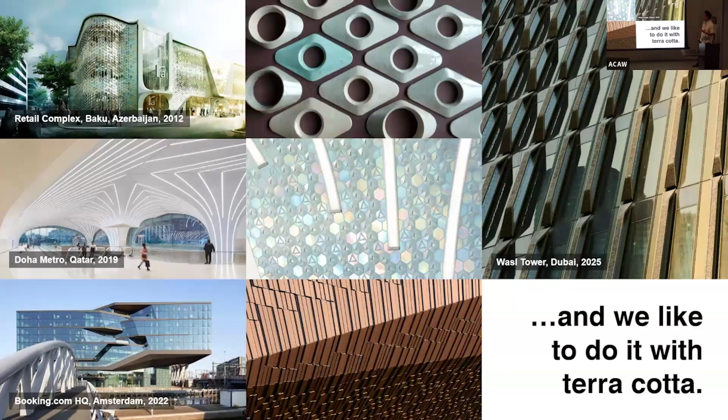At UNStudio, we always aim to create meaningful places, and that always depends on the context itself, because there's different scales we're looking at, whether they're bridges, towers, cities, or even products, to create a lasting impact. To do that, context is very important, and that context can depend, for example, on the level of a product. So for ACAW, we are pushing previous studies we've done, for example at the Wasl Tower with ceramics and terracotta, and other projects, to really test the limits and push the boundaries of what we can achieve through geometry, and also study the analysis to see what's possible and how it can affect the environment, and vice versa.

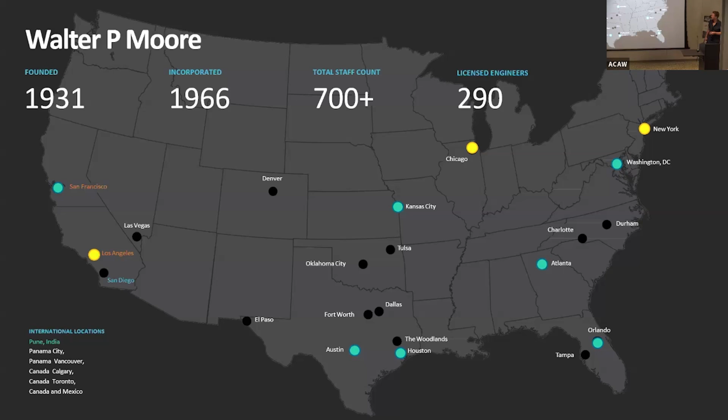This is our company, for those who are not familiar: we're a national and international firm of about 700 people, structural and facade, civil engineers, several other disciplines. We're coming out of the New York and LA offices, and we have a fairly large amount of offerings, which I won't really go into right now. We'll talk about that later if anyone's interested.

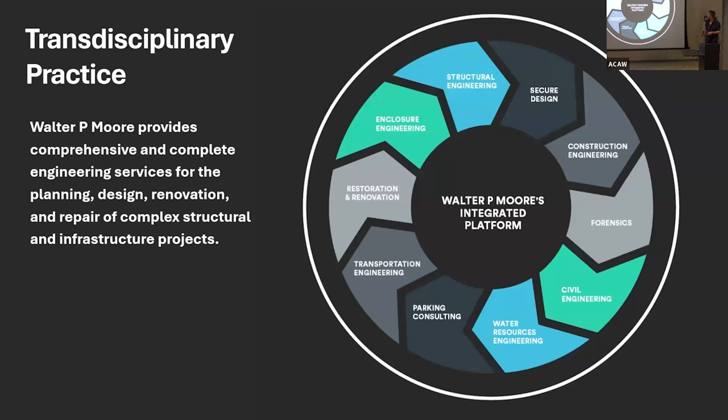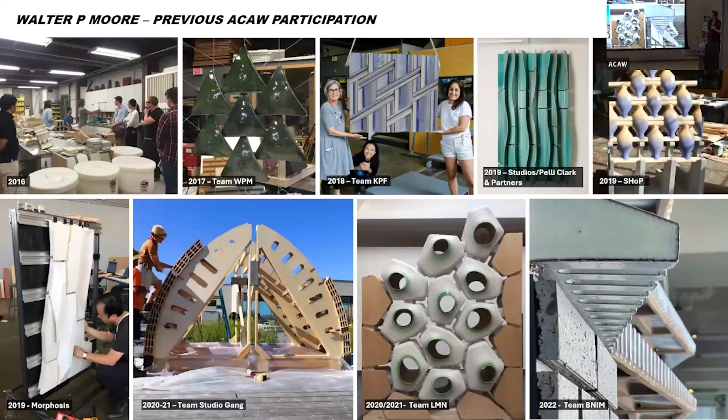We also do a large array of projects, just like UNStudio, trying to pay a lot of attention to placemaking, the human aspect of design and details. Even though a lot of the things we work on are very large, that doesn't mean that they need to be overwhelming, and sometimes we also do things in terracotta when we can, happily so. Here at ACAW, we've participated several times with many people that are here now and many people that have been here in previous years. We always enjoy doing whatever is thrown at us and sort of run with it.

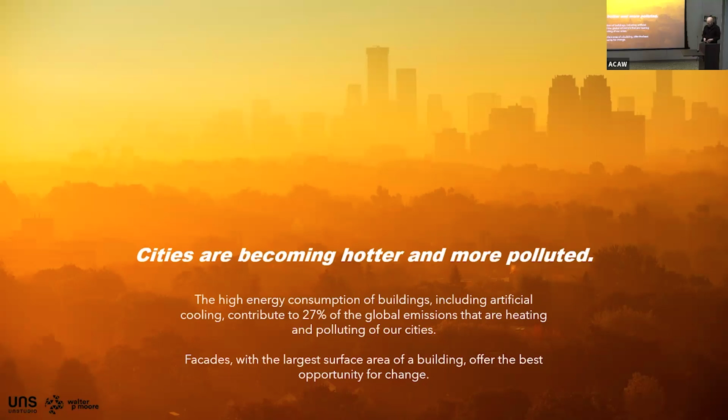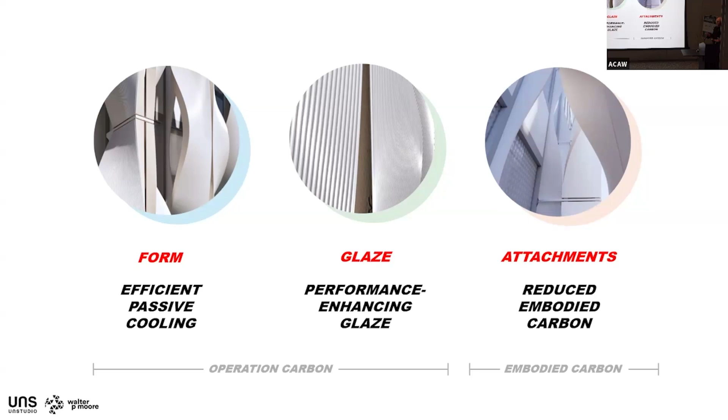So our proposal here comes with a threefold approach. First we're looking at the form of our terracotta facade system, how the form can be manipulated in such a way to maximize efficient passive cooling. We'll go into some of the inputs that drove the form that you see here. Then the glaze: terracotta is an inherently thermally performing material, as we know, but how can the glaze become part of that thermally performing possibility as well? Then the attachments, how can we design the system in a way that has a minimal attachment system to reduce the embodied carbon of the overall system? So we're dealing with operational carbon and embodied carbon in a combined way.

So first, looking at the form. The jumping off point for our project is the Wasl Tower, as briefly mentioned before. This is a project that we've designed, it's under construction now in Dubai. It is one of the tallest buildings that incorporates a terracotta facade.

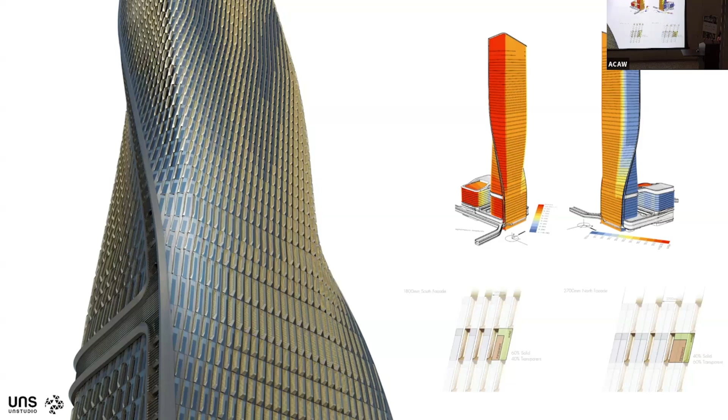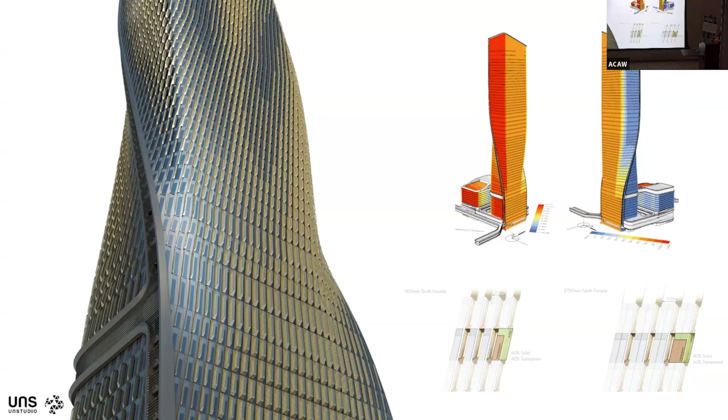Wasl Tower is designed to minimize or reduce the solar heat gain on the building, both in the overall form and in the arrangement of the fin system you see here on the left. As we designed, there have been all kinds of solar analyses done to show how we can arrange these terracotta fins to reduce that solar heat gain.

Here's a close-up of what that looks like on the left. You see the burnished terracotta glaze pattern and its attachment system. It really works like a kind of car grill. It takes on heat during the day, and by spacing it a bit separated from the building facade, it allows wind to move behind it to cool it off in the evenings as the sun is reduced.

There's a bunch of different factors we started to tease out from these studies: minimizing solar heat gain, minimizing the attachment system, maximizing visibility from inside of the building, optimizing daylight with the form, and a big component is how do you maximize the fabrication constraints of the terracotta.

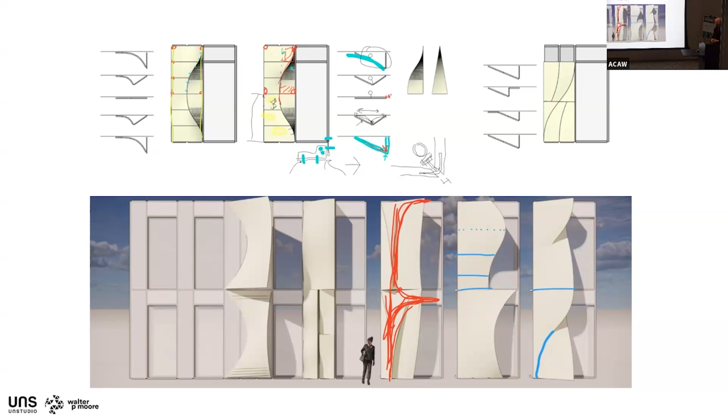In a typical curtain wall fully exposed to the sun, you have a lot of solar heat gain. Fin systems are successful in reducing some of that, but we wanted to take it further in our proposed system by manipulating the geometry to protect the building even more. We also have ideas about integrating ceramic frit to further reduce that.

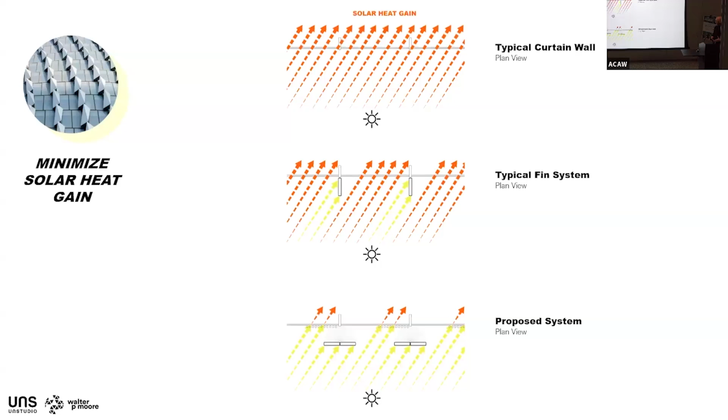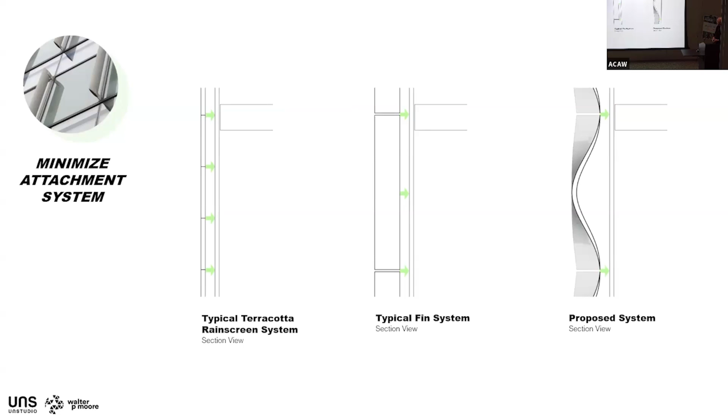Then minimizing the attachment system. Typical rain screens and fin systems might have multiple connections, but we wanted to maximize the fabrication constraints in this proposed system to minimize that attachment system. So in our system, it's really only connected top and bottom.

An important aspect is the visibility from inside of the building - how can the form be done in a way that allows for views through and behind the fin system as well?

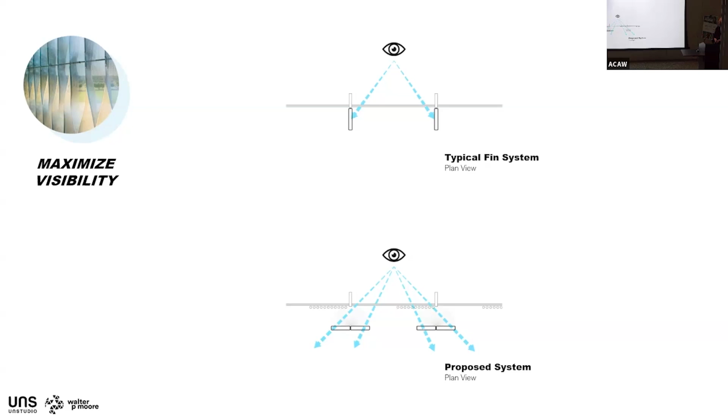And optimizing daylight - of course we want to allow light into the building, and how can the form be adjusted to maximize daylight deep inside the space of the building? That's part of the drivers of our form.

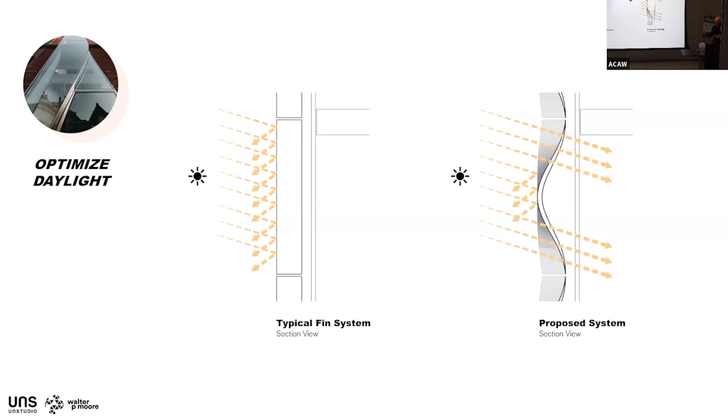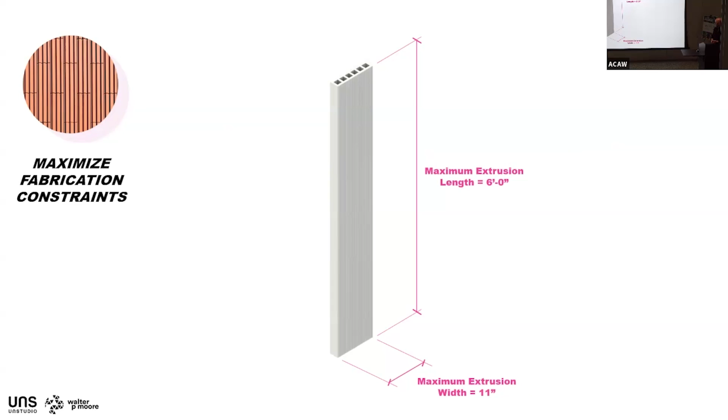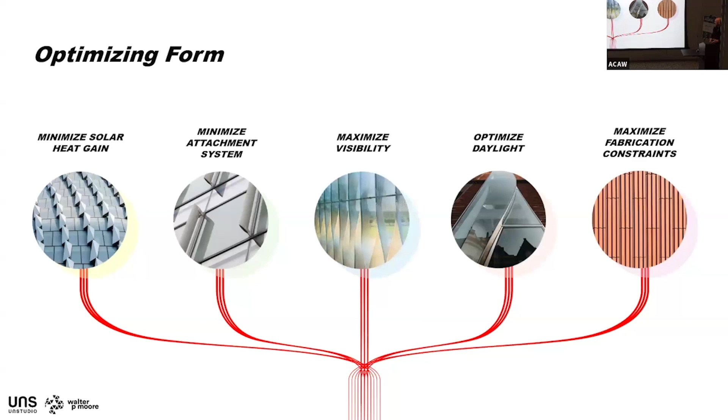And maximizing the fabrication constraints - this is what we've worked with Boston Valley on, trying to push the limits of. The maximum extrusion length we see on our mock-ups is 6 feet, trying to maximize the width as well. So taking all these different factors that are drivers of our form, putting them together...

And that's how we arrive at our forms - this kind of overlay of all those different inputs of the form. We're also seeing how we've done this in elevation and plan. This form was done by extruding to the maximum length.

We designed a form system that was then slumped onto - the form system is made out of terracotta as well, and the weight of the extrusion allows it to slump into the form to arrive at this twisted form you see here.

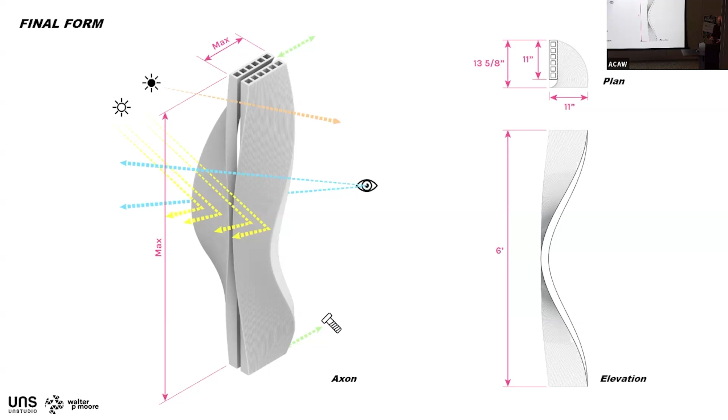And a big part of that, minimizing the attachment system, is how is this form stable and structural in a building application? So that's what Jake's going to tell us a bit about.

As Justin mentioned, part of the intent of this is to absolutely minimize as much metal on the project as possible. So in order to do that, we took it upon ourselves to try to optimize the amount of load that we are demanding the terracotta itself takes.

But because of the unique form of this, there's so much susceptibility to this system wanting to twist, rotate, and flex in somewhat unpredictable ways, because of how the fin curves and how it projects off the building, especially on a building like the Wasl Tower, where it goes quite high and twists around. We wanted to be as safe as possible, so the first thing we did was set a pretty low ceiling for what we wanted to allow the terracotta to take.

Using some of the data provided by Boston Valley, we tried to normalize this to take into account as much of the variation in the testing as possible, to minimize any of those potential variations from causing a problem on the project. Then separately, we applied a very high and rigid safety factor to the allowable stresses we were going to see, to make sure this is as safe as possible.

I think in the future we could probably refine this and reduce that, but for the purposes of this, we wanted the proof of concept.

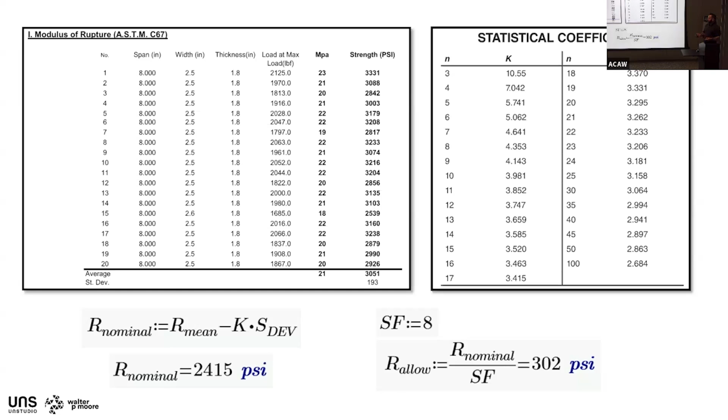Even with what we wound up finding, we set up a pretty detailed finite element analysis of this, and we ran it with wind hitting these systems at multiple angles and directions, trying to twist, pull, and flex this in as many ways as possible.

Ultimately, thanks to the strength of the terracotta itself, and also the internal structure of the webbing, the system performs very well and keeps those tensile stresses that want to break the material well below the limits we established for ourselves. I think in the future we could refine further, but for where we are now, at least as we're starting on this, the system has a lot of capacity and flexibility to take various loads.

We also investigated localizations of stress at the connection points to make certain that as this wants to twist, rotate, and break, it's not going to have a localized breakout at the ends of the system. As you can see, we use a threaded or sleeved anchor into the internal parts of the terracotta to help distribute that stress more.

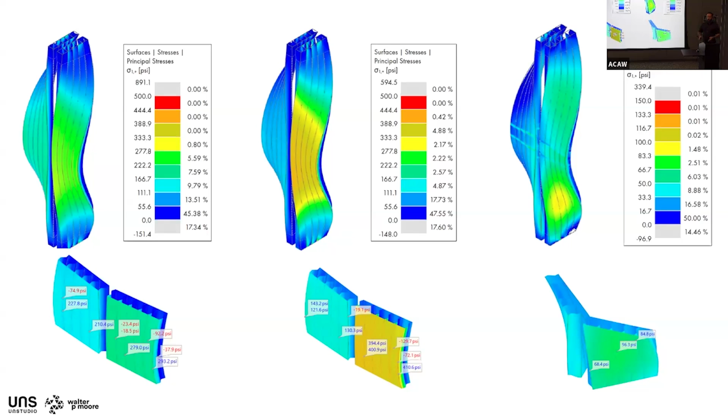We'll talk more about the attachment systems a little bit later in the presentation.

So, the next component of the system is the glaze, and Kevin's going to walk us through it. Kevin Canoply, UNStudio — thanks, Justin.

Justin and Jake just went through the first pillar of the presentation, which is how the form affects the carbon footprint of the building through things such as passive cooling, etc. The second pillar of the presentation will be about the glaze, and how the glaze actually contributes to the performance of the building, specifically by reducing operational carbon.

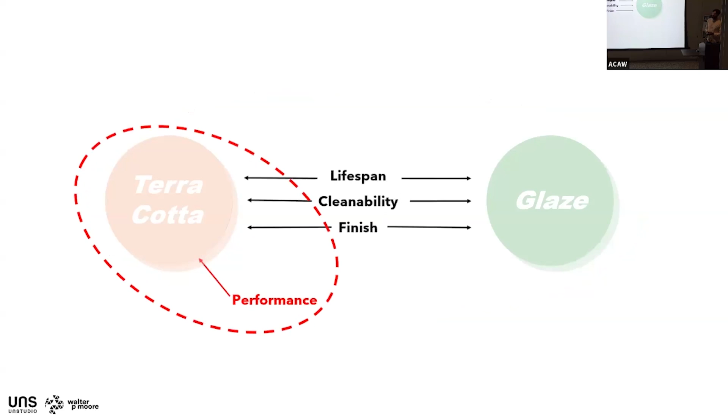When we look at a typical terracotta system, or what we'd been introduced to up to the moment of the workshop, the glaze already contributes, especially to the lifespan, the ability to clean the facade system, and being able to act as an integrated finish. What we weren't seeing was how the extra steps of needing to add glaze to the system, the efforts and the materials, that need to go into that.

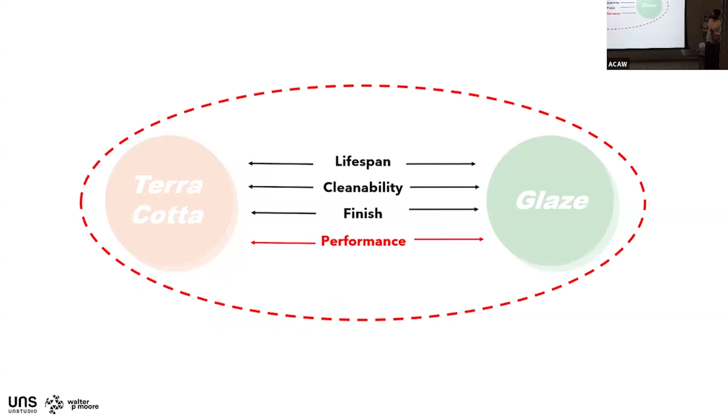We want to ask the question of how can we leverage that to also improve the performance of the system. As we mentioned before, it's an integrated system, and it should be leveraged in this sort of manner.

Similar to the first pillar, where we took inspiration from Wasl Tower, we also took inspiration from a previous UNStudio project for developing the glaze. The Coolest White was developed in 2019, an industry collaboration with Monopol Colors in Europe. Essentially, it is a high solar reflectance paint meant for metal substrates.

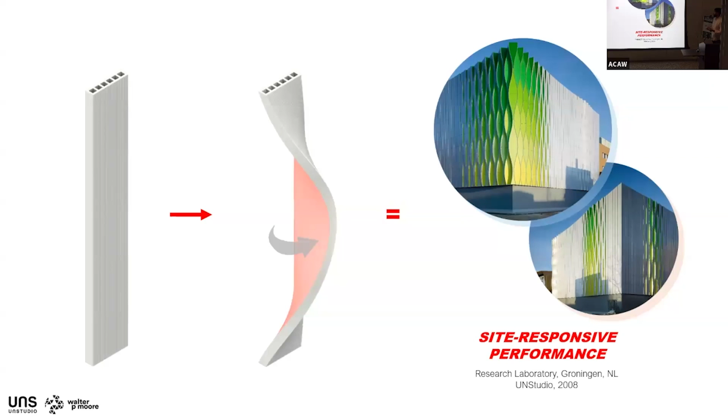When we combine this with the form-making we went through previously, we start to see this interesting thing happening with the twist, where there are different angles and faces that get exposed in different orientations because of how the material and geometry are working.

You see in this UNStudio project from 2008 that different vantage points and contexts can have different responses based on which side or face of the material is facing outward. With that in mind, we started to think: can a terracotta piece that typically has its backside hidden against the interior cavity of the facade instead become exposed in a fin system? Can we have a double-sided system?

I'll try to go through these quickly since they're quite important. We have the typical system we're trying to achieve, where one side is a finish while also providing high solar reflectance. We had questions about being able to view this fin from the interior.

Could we have a finish on the interior as well that reflects into the interior? There are many precedents about how additives or paints are added to facade systems to aid with pollution mitigation and capture. Can water be run through inside systems or on systems, which we'll hear about later, to facilitate evaporative cooling?

There are interesting explorations into how we can join multiple terracotta pieces together, where the backside acts as a structural membrane holding them together without mechanical fasteners. Ultimately what we're aiming for is an integrated product where a lot of these different factors come together.

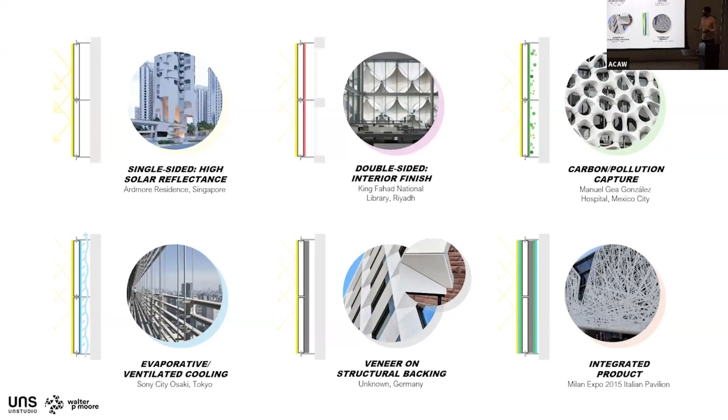Many thanks to Andy for helping us a lot, bringing his knowledge about what's out there in the industry and what's actually in the market that can be scalable to produce these various glazes. I'll go through them again quickly, and Andy, yell at me if I say something wrong about these chemistry-oriented names.

Ultrox is basically a commercially available white pigment typically used in sanitary products, like in the bathroom, to make something super white. That's a pigment that's very readily available.

Soldalit is a mineral-based, post-applied paint that bonds to masonry but also ceramic products. Andy tested this for us and saw it was working quite well with the terracotta. The specific one in Test 2 had a titanium dioxide photocatalytic additive, meant to help improve the cleanability of that surface.

Barium sulfate, similar to titanium dioxide, is a photocatalytic material that has a very high solar reflectance and also helps improve the cleanability of the surface. Soldalit Coolit, as the name implies, is similar to Glaze Test 2 - it's a post-applied finish meant to cool down masonry systems.

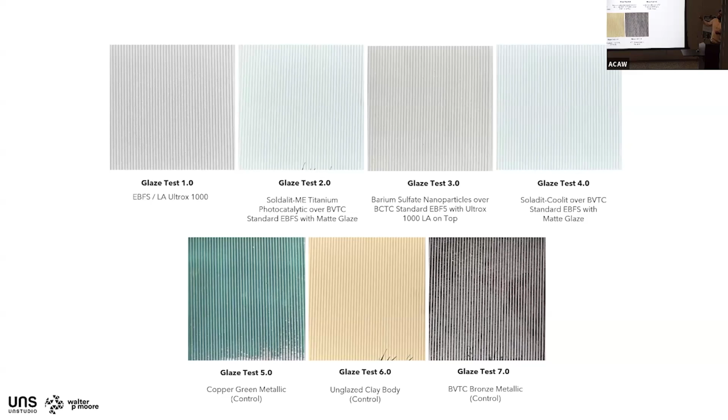What we tried to test on the bottom three control pieces was with the copper green - could we have a really lustrous, shiny surface, and does that actually impact how much sunlight is reflected? And of course an unglazed clay body, to see how that performs. The bronze metallic is essentially trying to create a very dark glaze and surface, to see if that increases the amount of heat retained and absorbed.

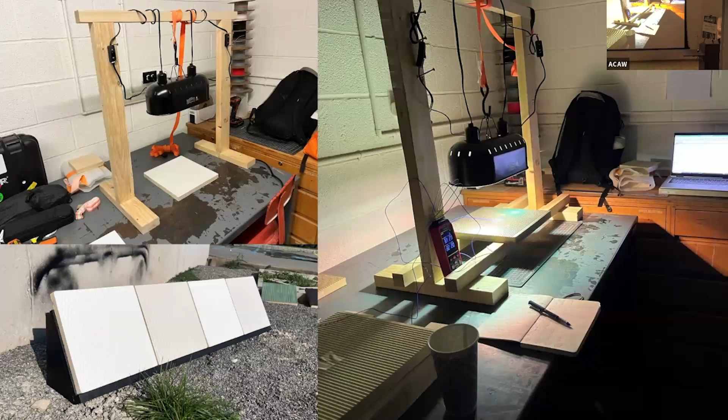So I'll pass it over here. Thank you, Kevin. So we decided to science this a little bit.

This is the setup that we've been working with this past week. What you see there, is there a pointer? I'm going to wreak havoc here now.

Just what you see there, that red gauge, that's a thermocouple which gets attached to the front and back of these samples. We're going to show you just a subset of this because there's more data than we have time to talk about. And also, as you can probably tell, there are scientists in this room and I'm sure you have opinions on this experimental setup, but this is two full spectrum UVA, UVB 150 watt lamps, the kind you use if you have a reptile at home to heat them up.

The basic setup of the experiment is to heat with a thermocouple front and back, and check that also with a regular point and shoot laser thermometer. We measure the starting temperature, the temperature after 10 minutes of heating, and then the temperature after 10 minutes of taking it out of the light and letting it cool off.

Interestingly, with a thermal camera you get sort of predictable results. You start cold, then you go up to something warmer, and then after 10 minutes, no sample gets rid of all its stored heat. So that's sort of hinting at the urban heat island problem in thermally inert materials that we're already aware of.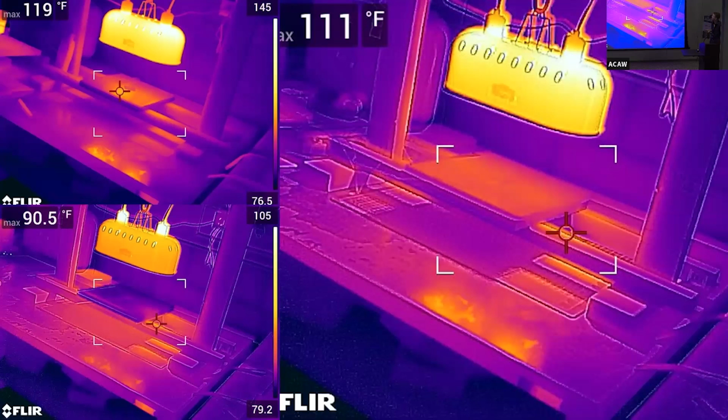Now what's interesting is comparing some of the samples you see over there with the ones that Kevin just showed before. We just picked four here for the sake of expediency. These data points might be a little hard to read, I apologize, we're better at some things than we are at Excel graph drawing.

But what you can basically see at the top left is that if you do what I just described to an unglazed tan body, you start at, this is centigrade by the way, so the steps are about half of what Fahrenheit would be, but the relative situation is the same. You'd start around 25, which is the room temperature in that little room we were in. After 10 minutes you're up at 35 degrees by thermocouple, up at 40 with the laser thermometer, and then after another 10 minutes you're down at those numbers you see to the right, at 30.2, 29.6, 28.5. So they sort of converge again at the end, and not all of the stored heat is gotten rid of.

Also predictably, the laser thermometer measures something much higher than the thermocouple, because one of them is in direct contact and the other is not.

But when we then go to the darkest of the samples we have, we see that you go up to over 45 degrees and down again to something further away from the starting temperature. So this is also kind of predictable, we know that dark materials do this, and this experiment should also be repeated where we can take into account the actual reflectance of the material and the sheen of it. But we did what we could this week.

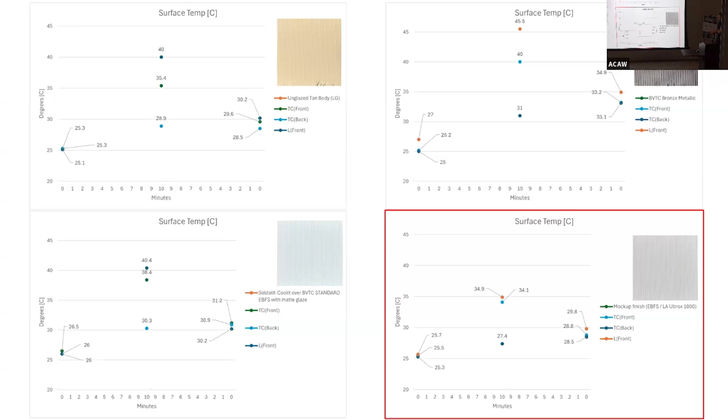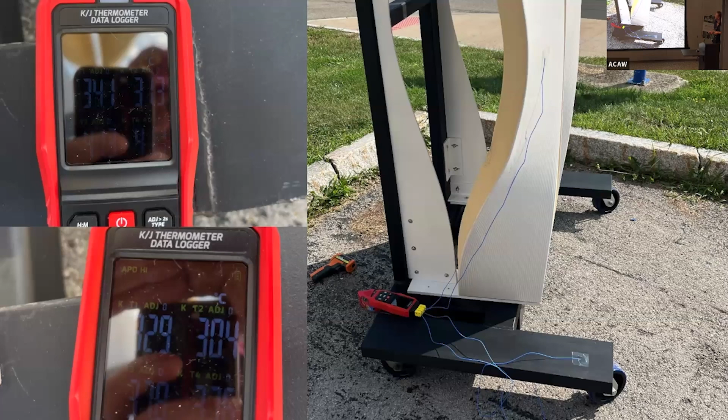You can also see the light really plays in an interesting way on this, and obviously having a flat sample under a terrarium lamp versus having it in the sun are two different things. So we did a super quick and dirty check, just to see what would happen if we compared the front and back of this with the carbon steel brick that it's standing on.

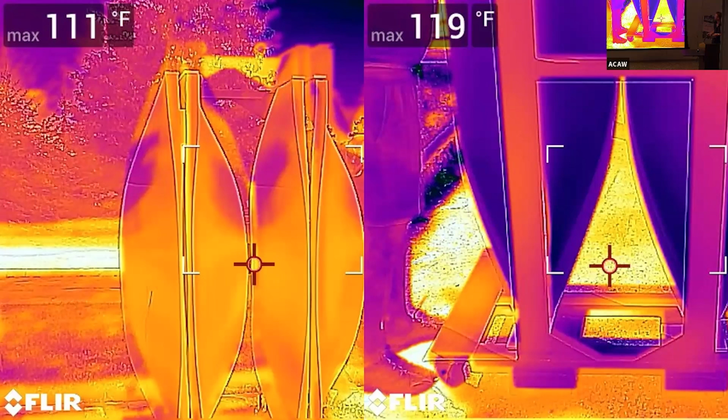This is a little hard to see because it was in full sun on top of the gauge, but basically it shows that the steel, predictably, is much hotter than the terracotta. It heats all the way through, almost the same temperature front and back, whereas the terracotta has a much cooler back than front, even under the same sunlight incidence. This is a quick thermal image showing the blue as the back of the terracotta, and the red and orange as the steel, and the person also, predictably.

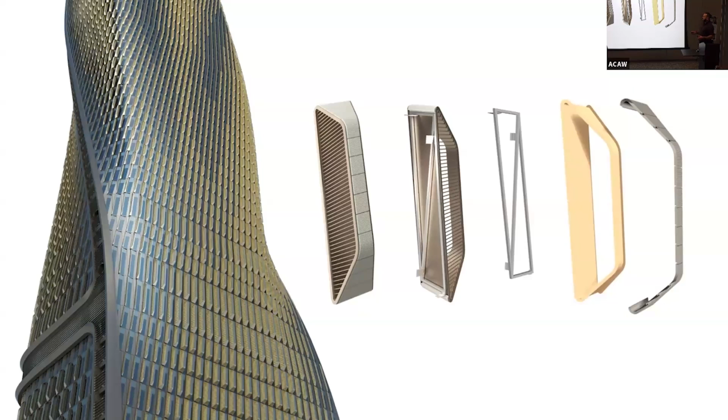Just to start, here's an exploded view of the original Wasl detailing system. I won't spend too much time on this—I'll focus more on our system—but you can see there's a built-up frame with everything put together on it, and these were lifted into place and attached to the building.

For us, we went through a bunch of iterations. As Kevin mentioned earlier, we played with different forms. What we originally looked at allowed the terracotta to be formed a bit more simply, but it necessitated more connection design. Ultimately, we were trying to brace that middle area where there was originally a break in the terracotta, which introduced a weak point.

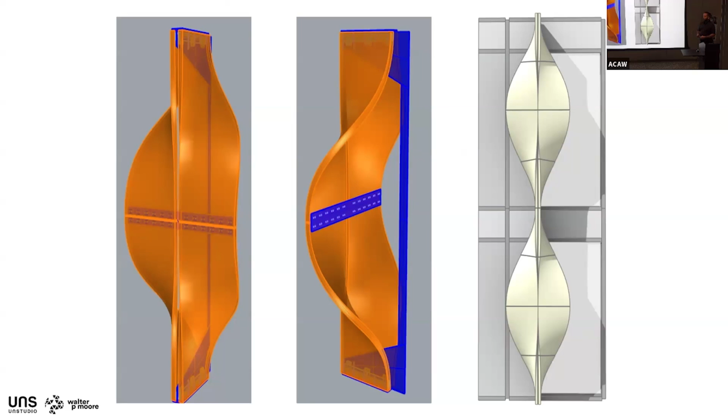As we furthered our design and pushed the terracotta to do more of the heavy lifting, we ultimately came up with the attachment systems that we showed before.

Right now, the way we have this detailed and assumed to function is that there's an internal carbon steel reinforcement frame within a curtain wall unit, with discrete attachment fins that come out, also carbon steel. All of this would be painted. The central fin, behind the terracotta but outboard of the curtain wall, will most likely be aluminum, but could also be a reduced steel depending on what we're looking for.

Part of the reason it's important to tie this into the curtain wall is that since this whole system wants to act as a sail and sway, we want to tie it into a diaphragm of some sort to help stiffen it against lateral movement, which we'll show more when I go over the results. By tying this into a curtain wall system, we're able to use the silicone to tie it into the glass and have the whole unit act together, which helps validate the proof of concept.

By doing all of this—and you can see the comparison of materials we ultimately used—there's a small reduction in the mass of the overall assembly once we account for the curtain wall and the system behind it. But as you can see in the image on the right, showing global warming potential by assembly, comparing the overall component elements, we have a huge reduction in the global warming potential we're finding.

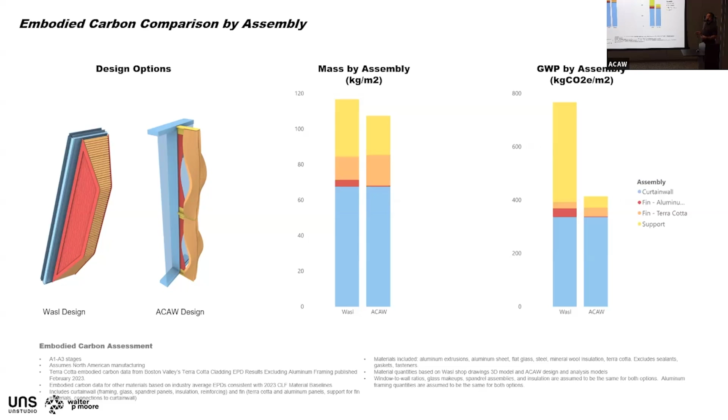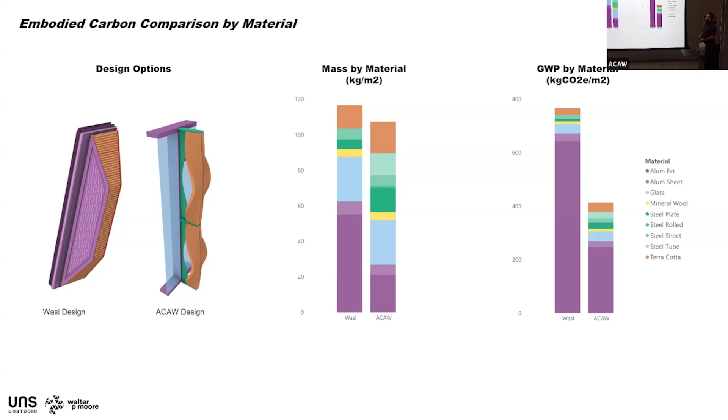To refine that further, this breaks it down by material, so you can see how much of the aluminum, how much of the metal, we're really taking out of the system. I'll show those two images again, but with more of the exploded view shown, so you can see the same data a little more clearly.

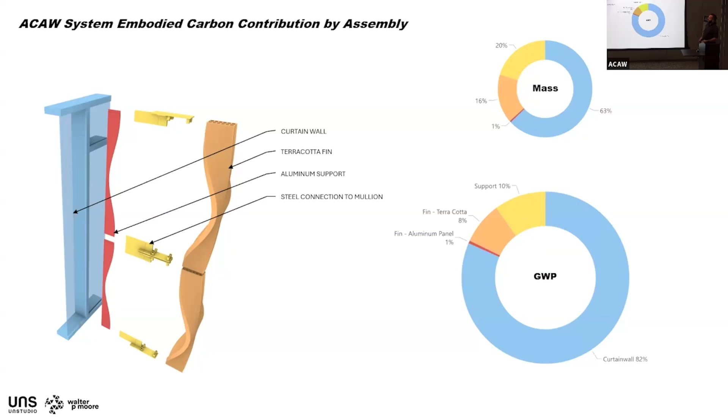Not shown in this image, because it's hidden by the curtain wall, is the steel vertical, but it is in there. It is accounted for in our analysis; it just isn't able to be seen.

Moving on to proving that this can actually function on a building and that this will be something we can make use of in a real practical application, we took the analyses shown earlier and further elaborated on them, developing an analysis that incorporates the steel connections, the plates, the angles, and everything going back into the vertical post I mentioned. On the right, you can see we analyzed this with a pretty high degree of detail in how many nodes and structures we're looking at within the finite element system.

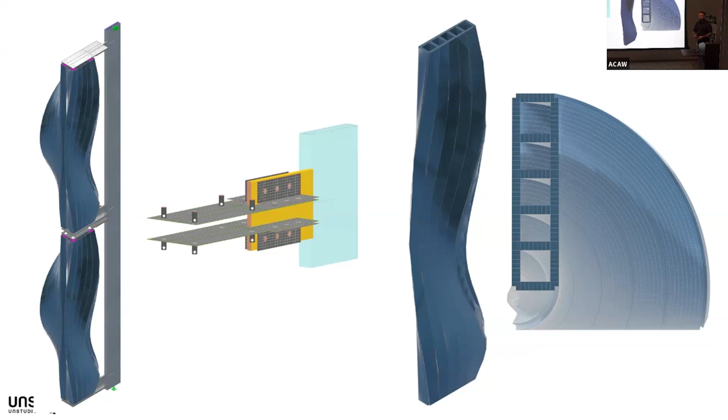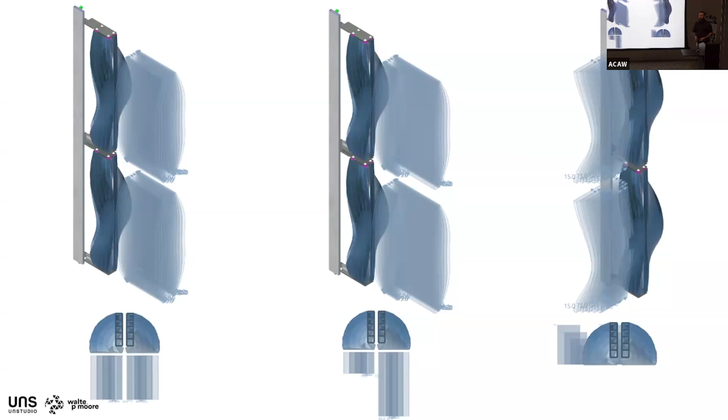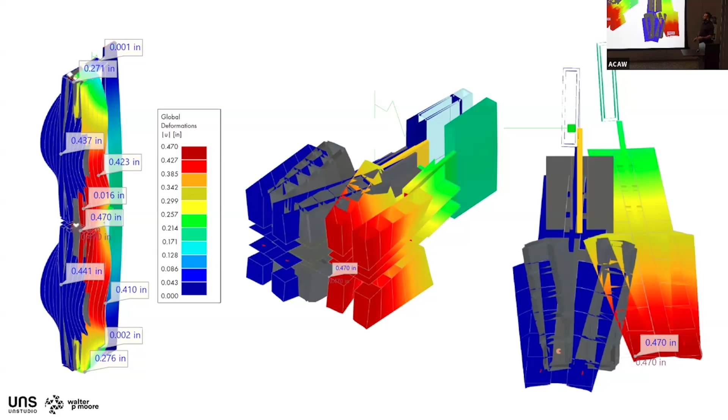I mentioned before that we'd talk more about the loads we used and how we applied them. On the bottom, you can see a more easily understandable breakdown of some of the load patterns used: straight on, a little unbalanced with a twist, or completely laterally acting as a sail. Looking at how this deflects and moves, there is a lot of shifting that wants to happen. This whole system wants to sway, but the majority of that sway comes not from the outboard system but from the deflection of the mullion itself, which is why we want to tie this into the structure and let it stiffen itself using the diaphragm. This is at absolute peak worst case deflection and worst case loading, which I don't believe is really realistic, but it was something to get us started.

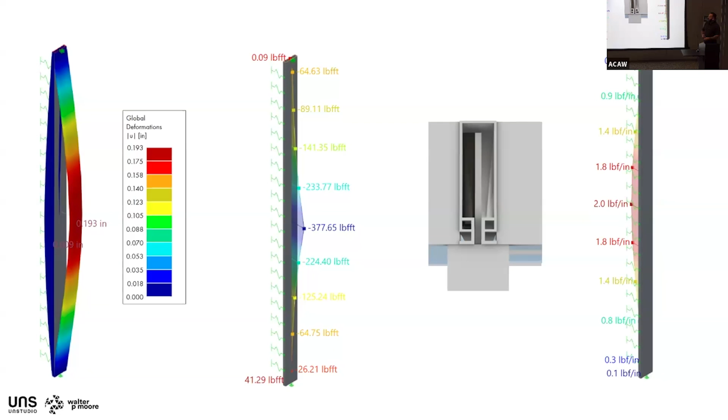You can see here the loads as these are shared together. The loads on the right are effectively the stresses we're inducing into the structural silicone, which comes out to less than about 4 psi on a typical curtain wall joint. So it seems like something that can be used without overstressing or over-taxing an existing system or whatever it's being tied into.

So those are the three main tenets of our proposal.

We also wanted to show some applications where this could be used. One is incorporating these vertical fins within a curtain wall system, with terracotta that's thermal, recyclable, and low emissions. There's also the coolest glaze, which is about solar reflectance, carbon capture potentially, and a beautiful finish. Rounding out the system, we look at further reducing solar heat gain on the building by integrating a frit that plays with the form of the fin, and incorporating the coolest white on all the metal and aluminum elements.

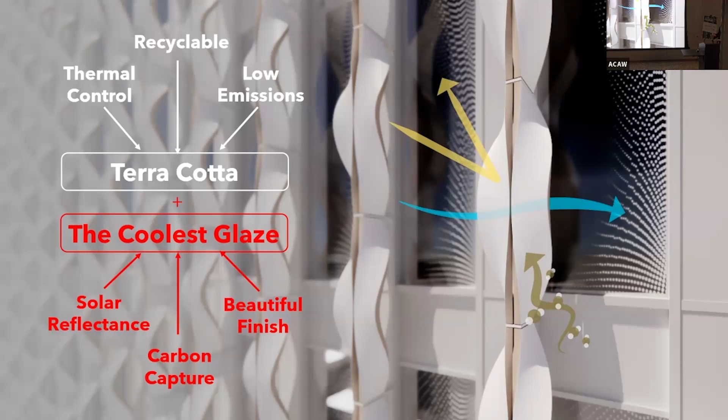And a little time lapse showing how the sun plays over it.

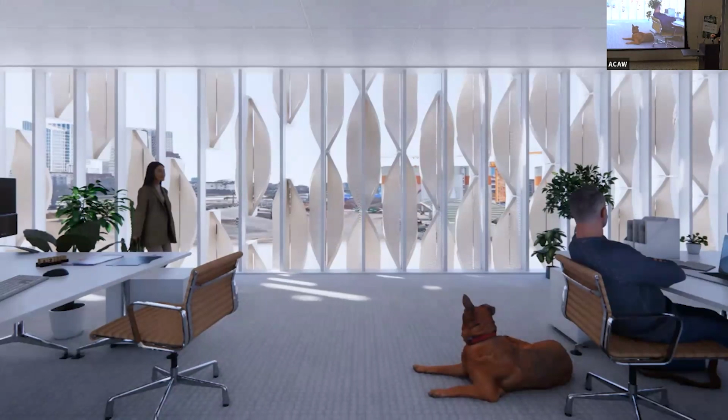We also have some views from interiors, showing how in certain situations this might want to act more as a denser screening, but you're still getting plenty of view out as well, and getting exposure to that second surface.

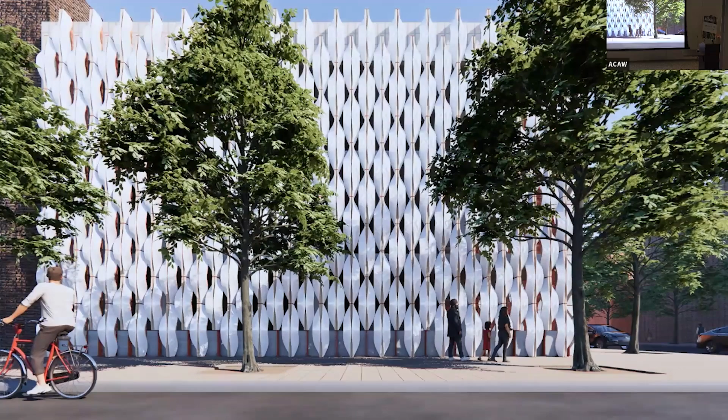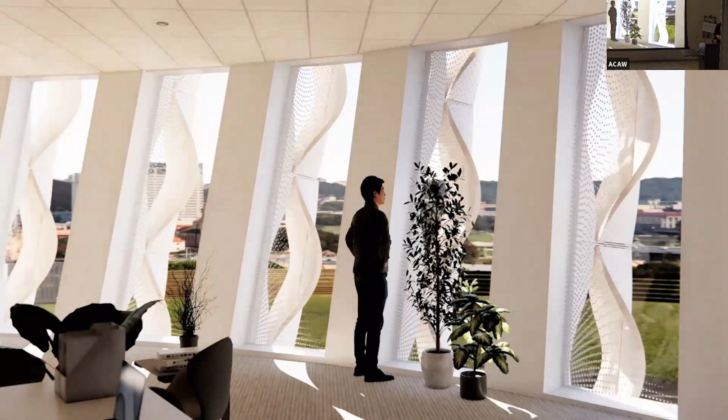In other applications, it could be more of a low-rise facade, perhaps even on a building that doesn't have windows, to still act thermally for that building, again showing how you get those oblique views out through the fin system, allowing for a nice variety of light within the space.

So we'll end with the next steps: how we'd improve this amazing workshop we were able to participate in, and definitely learned a lot along the way. As many of you heard and saw walking through the factory on Monday, there were quite a few complications and hurdles in fabricating the terracotta pieces, due to their size and weight, particularly with the drying. There were some scenarios where the drying was not successful and ended in cracks and failure right through the middle of those pieces.

Over the past two days, there were some complications with the assembly itself, due to the specific geometries at the ends of the pieces that were sawed off to accept the connections, in order to mount these in and afterwards tip them up. So for next steps on this design, we want to think about reducing mass in terms of the webbing.

But also, if there are other processes or even a different connection design that could happen at the top and bottom to make assembly a lot easier, thinking about how this can be scaled more, especially in scenarios where you have a lot of this on a facade.

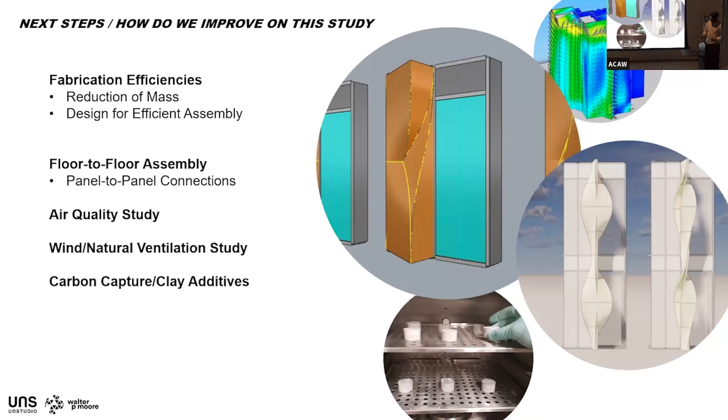Oh, question time. Are there questions? One in the corner here.

Thanks for the awesome presentation, it's a really beautiful piece. For those who weren't part of the factory tour on Monday, I'm curious how these were dried to mitigate the warping and cracking you were talking about.

Yeah, I wasn't even there yesterday myself, but we create specialty refractory jigs to support the pieces. It's a technical process for us that we've put a lot of investment into in terms of research and development to help ensure them.

UNStudio and Walter P. Moore really did push the limits of what's possible in terms of drying and scale, twist, and the drying itself, which happens in tents.

The pieces shrink. Clay naturally shrinks somewhere between 5 and 15 percent, so across a length like this, that's about 6 to 8 inches. So it would start off larger here. It's quite a process, and it was very successful.

I give kudos to our production team for being able to pull it off. But there's no doubt they pushed our limits. Yeah, it's pretty amazing. Thank you.